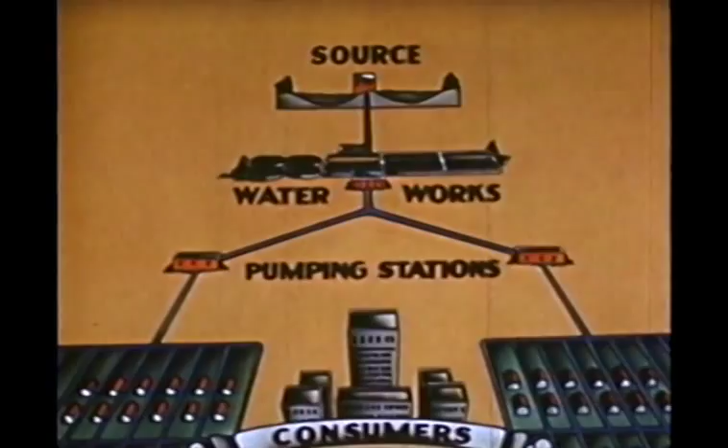The powerful surging waters of the Missouri River, the Big Muddy, are the source of one city's system. Here, mingled in the turbulent flow, are waters from the mountains of Wyoming and Montana, from the plains of the Dakotas, of Nebraska, and of Iowa, a mighty flow of water which is tapped for Kansas City.

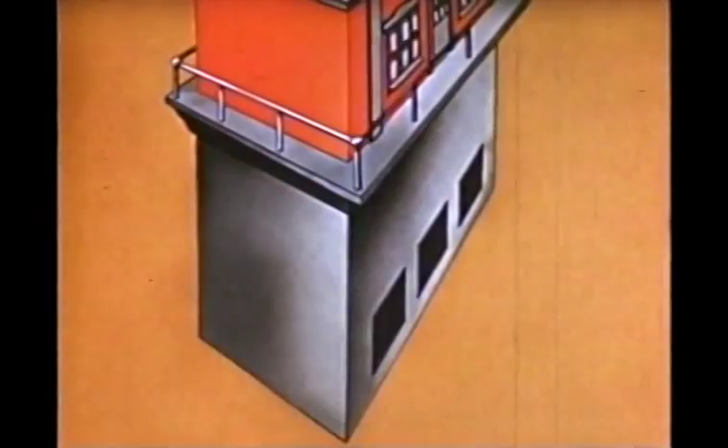The water is drawn in at the intake building on the deep current side of the river 4 miles above the city. This building rises from the bed of the river, so that no matter how low the surface level, the water supply will never fail. The water must pass through the intake bars, which keep out driftwood and other large debris.

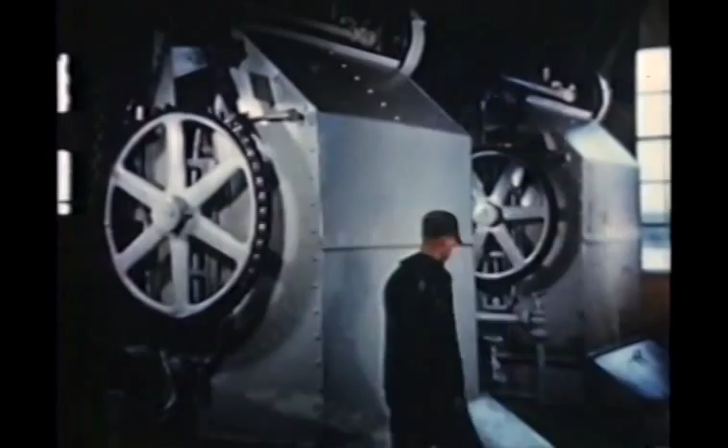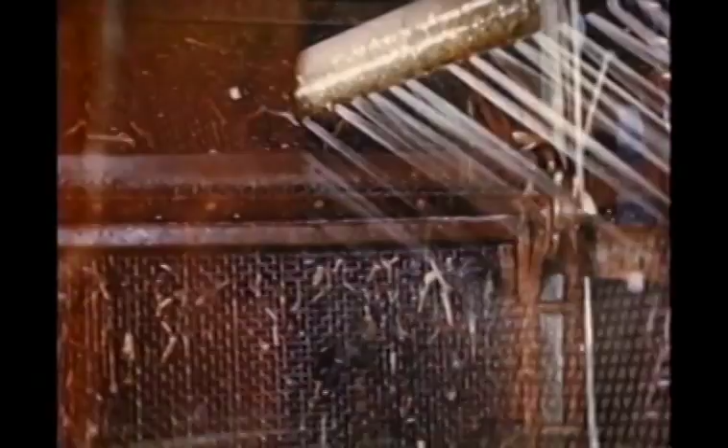The water must pass through a series of revolving screens, then is drawn up and out. The screens behind the bars are fine enough to hold back the smaller cargo of the river. Powerful jets of water at intervals are directed against the screens to keep them clean.

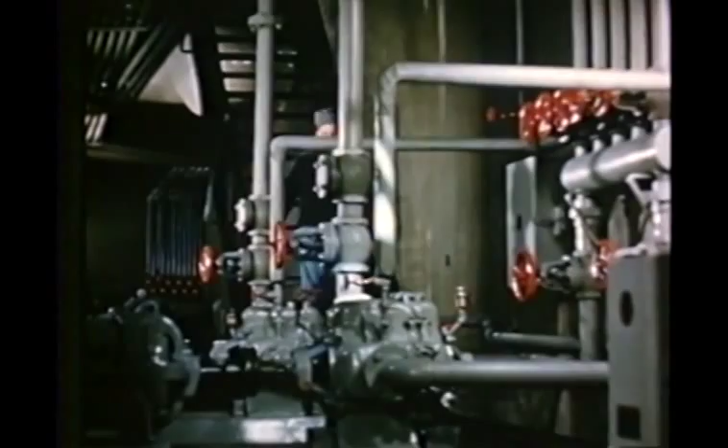Just north of the intake building is the low-lift pumping station, which draws the water from the river intake. Within this building are the first of a series of power machines. 5 huge electric motors drive the centrifugal pumps that draw billions of gallons a year to meet the needs of the Kansas City area.

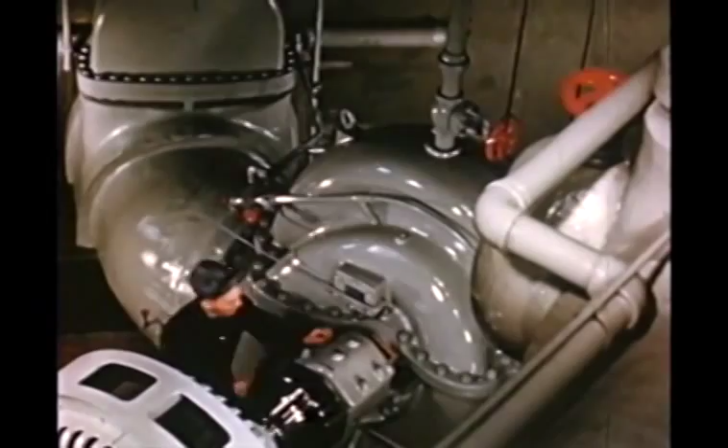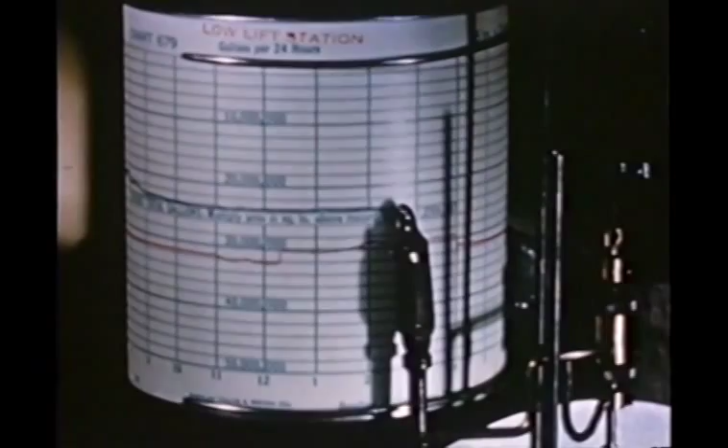These mammoth pumps have a total capacity of 160 million gallons every day. Constant check and measurement of the flow requires a vast array of precision instruments and recording equipment. At the rate of over 27 billion gallons every year, the water is on its way to the first stage of transformation from muddy water to clear water.

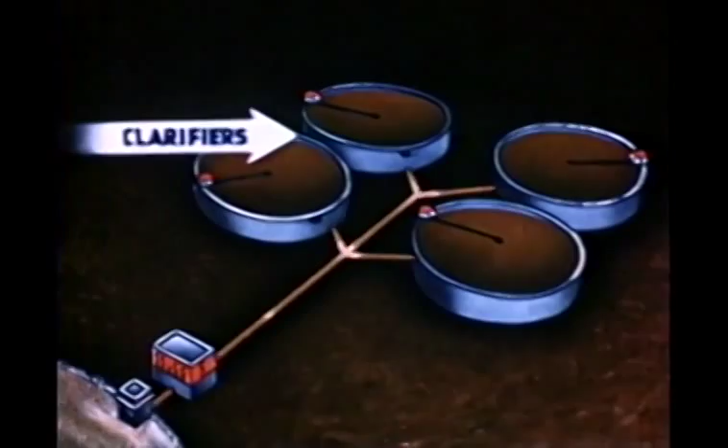From the low-lift pumping station, near the river's edge, the water is pumped underground to the group of 4 clarifiers. These primary clarifiers are simply huge settling basins through which the water is moved very slowly, allowing the greater part of the mud and other foreign matter to settle.

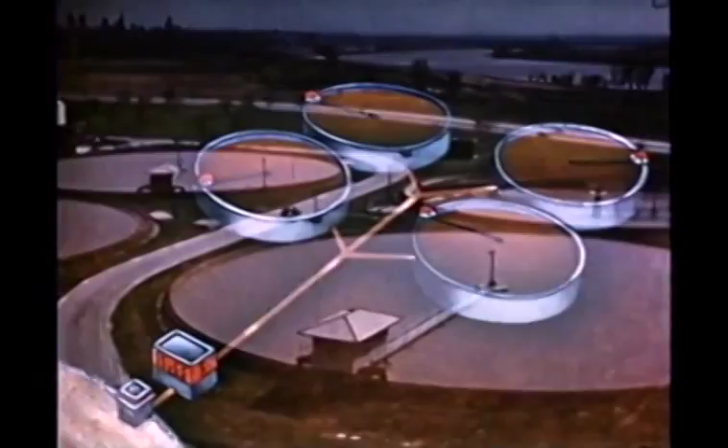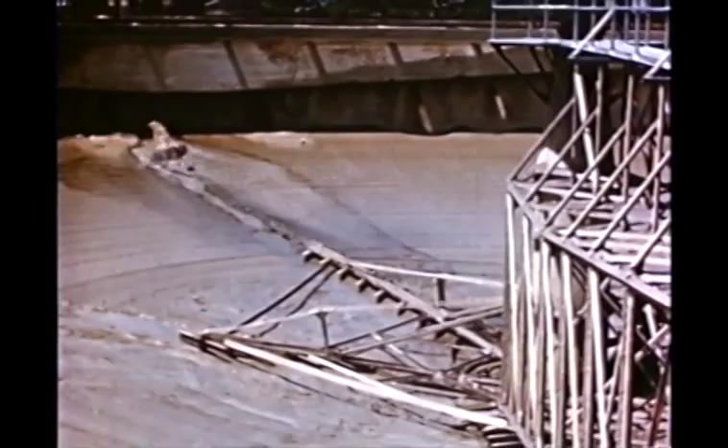Each of the 4 monster basins holds 4 million gallons. The huge capacity is easily seen when the basin is empty. Within the settling basin, the water loses most of its heavier mud and silt.

The science of chemistry plays a vital part in the modern water system, and so at every stage, samples are brought into the laboratory. This is water as it comes from the river. After passing through the settling basins or primary clarifiers, the water is noticeably clearer.

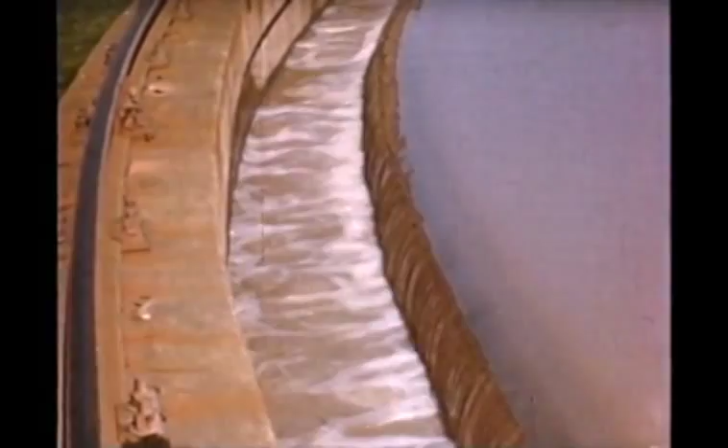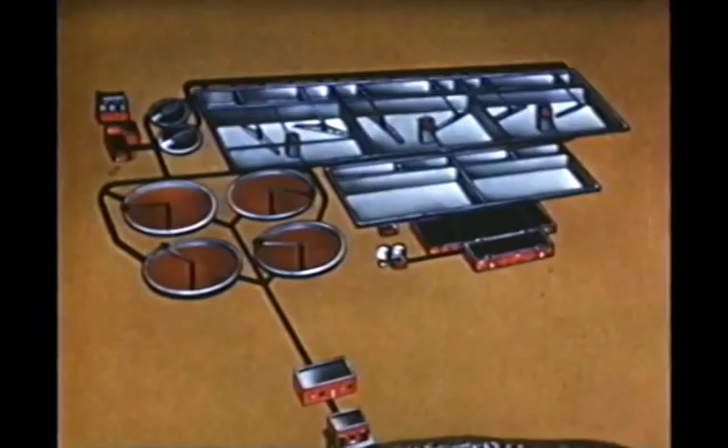And so, having rid itself of part of its burden, the water flows out of the settling basins on its way to a chemical treatment, the first of several which originate in the chemical building. From the settling basins, the water enters mains underground. Here, the water receives its first treatment of chlorine from the chemical building. This initial chlorination destroys most of the bacteria present in the river water.

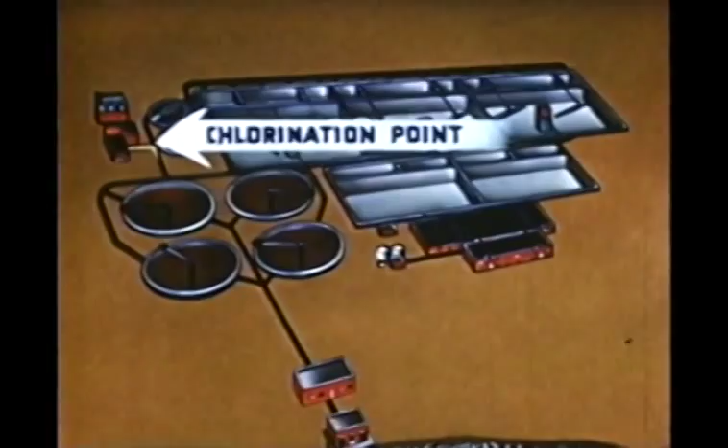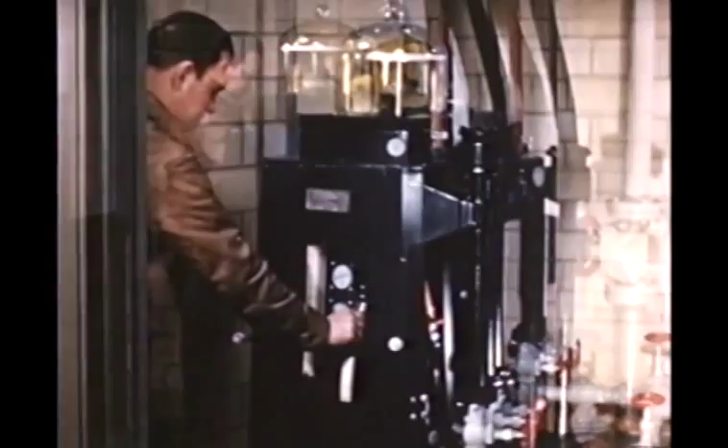While a full carload of chlorine is required each month, it actually takes only 15 pounds to sterilize 1 million gallons of water. The quantity of chlorine to be added is carefully controlled. From the chlorination point, the water moves on to the mixing tanks.

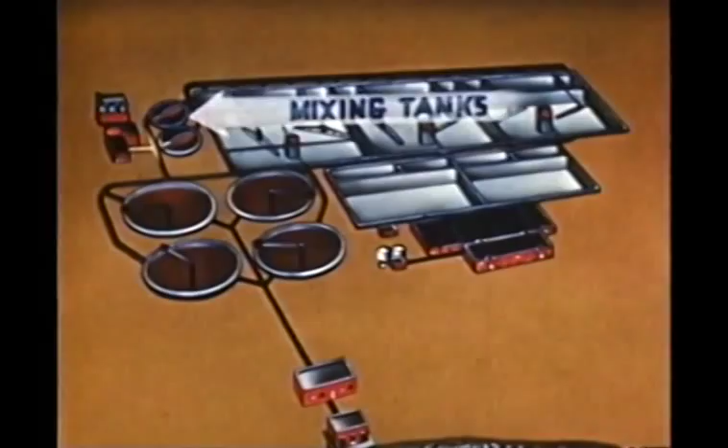In these great basins, located just east of the chemical building, the water receives the bulk of the chemical treatment it must undergo to soften, clarify, and sterilize it. The other elements necessary to the treatment of water are brought directly to the chemical building to be carefully checked and weighed to meet the requirements of modern scientific water purification. By a series of conveyors, the contents of the cars are moved to storage bins.

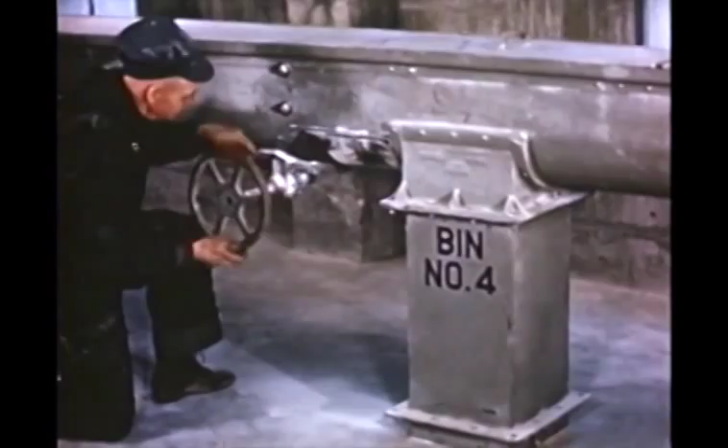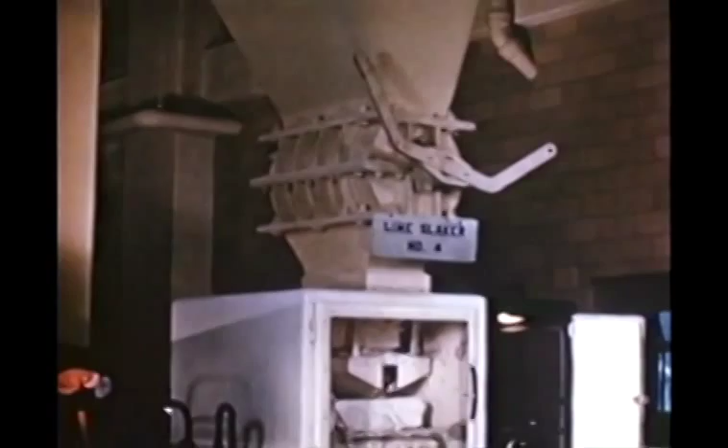From the bins, the chemicals are automatically released as needed to electric weighing machines or dispensers. These machines are adjusted to deliver the exact quantities of chemicals required. Chemists are checking constantly to make sure that the quantities released are those specified by the main laboratory. Every step in the purification of water must be scientifically controlled.

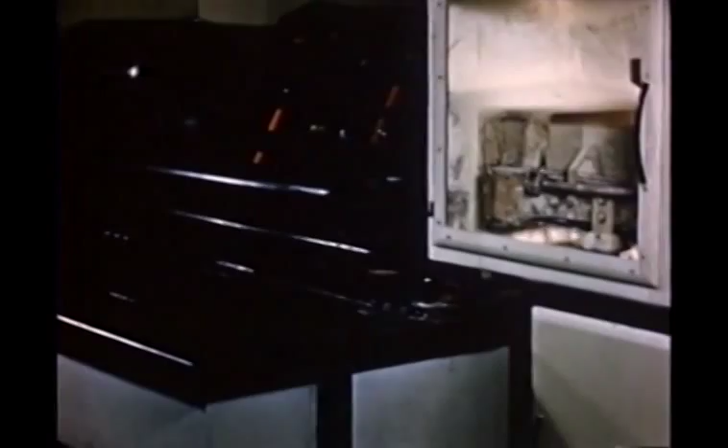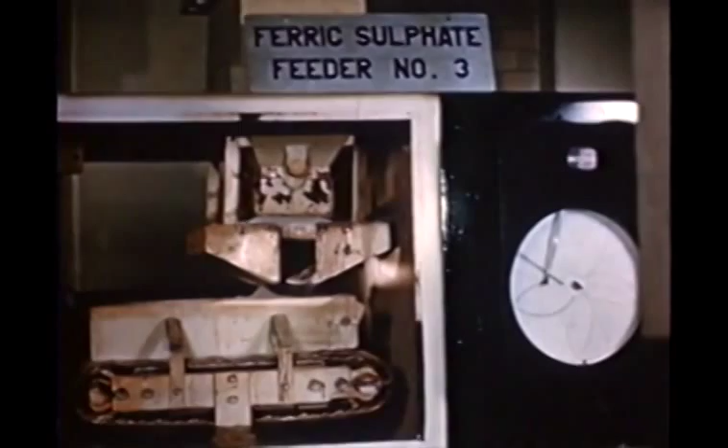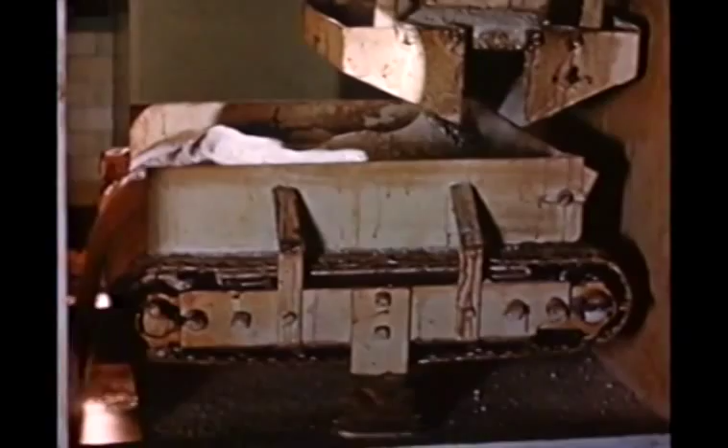Chemicals are fed by the dispensers into tanks to be mixed with water for ease in handling. The lime helps to soften the water. Ferric and aluminum sulfate will serve to clarify it. And sodium carbonate, or soda ash, is an additional softening agent. The solutions move into troughs leading out of the chemical building.

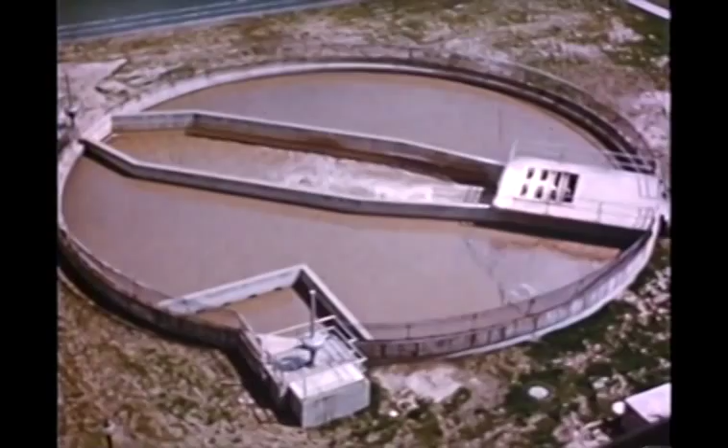The master flow meter shows the volume of water to be treated in the mixing basins. In the center of each basin is the mixing flume, where the chemical solutions are added to the water as it flows in from the clarifiers. Now, with the chemicals thoroughly mixed, the water moves out of the mixing basins. Flowing underground, it enters the primary flocculator, or first chemical reaction basins.

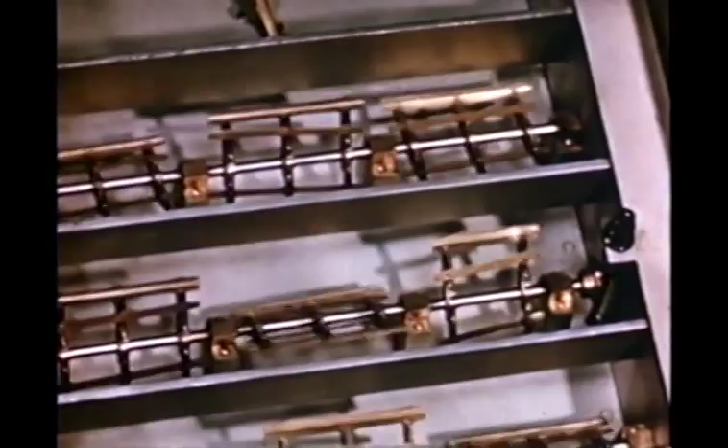These basins are equipped with flocculators, or mixing paddles, shown here in a working model. The purpose of the paddles is to gently agitate the water. Laden with chemicals, the water enters these primary reaction basins. Now the chemicals form sticky, gelatin-like particles known as floc. The chemicals have begun to do their job.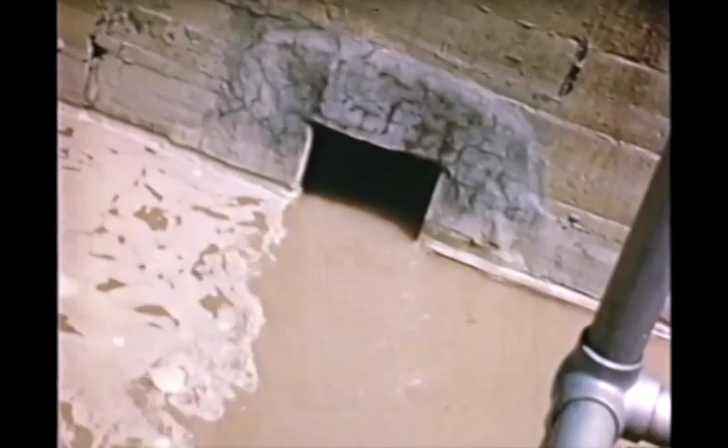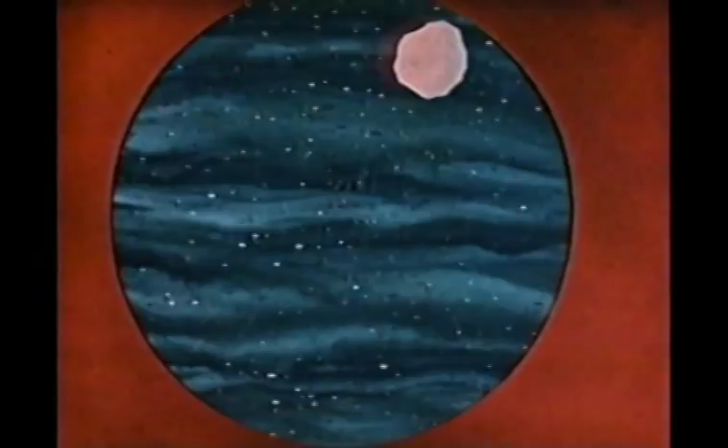If the process were studied under a microscope, it might look like this. Under the gentle agitation of the water caused by the paddles, the floc moves about, attracts, and absorbs the mud, silt, and bacteria. In so doing, the floc grows in weight and volume. This is the water as it enters the primary reaction basins, and as it looks after the floc has absorbed the foreign matter.

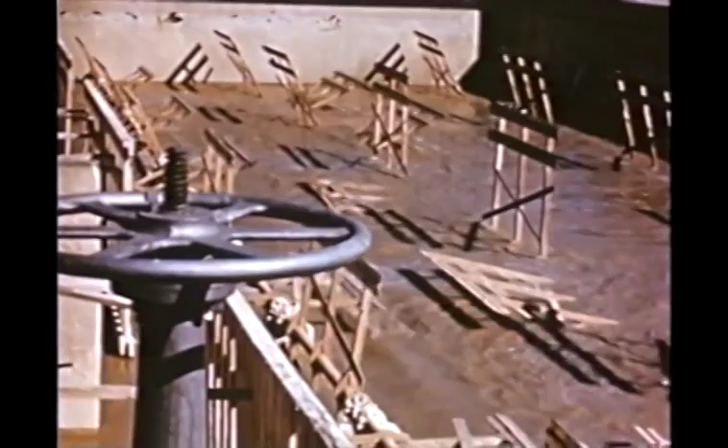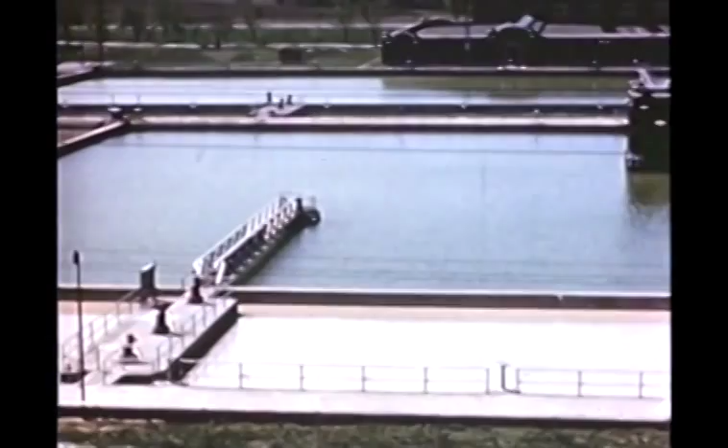The chemical reaction basins are full at all times under normal operation. When the basins are drained periodically for inspection, the size and arrangement of the equipment can be seen. Now the murky waters of the reaction basin are ready to move on into the larger basin, the secondary clarifier. The concrete wall separating the two has openings beneath the surface.

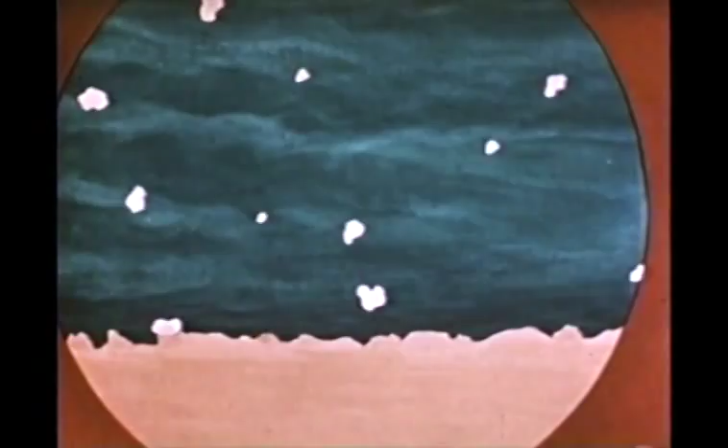The water, heavy with floc, moves through the openings in this wall into the clarifiers or secondary settling basins. The contrast in color between the water in the reaction basin and in the clarifier gives dramatic evidence of the change taking place. The comparatively quiet water of the clarifier or settling basin allows the billions of tiny pieces of floc to sink to the bottom, carrying with them most of the remaining impurities in the water.

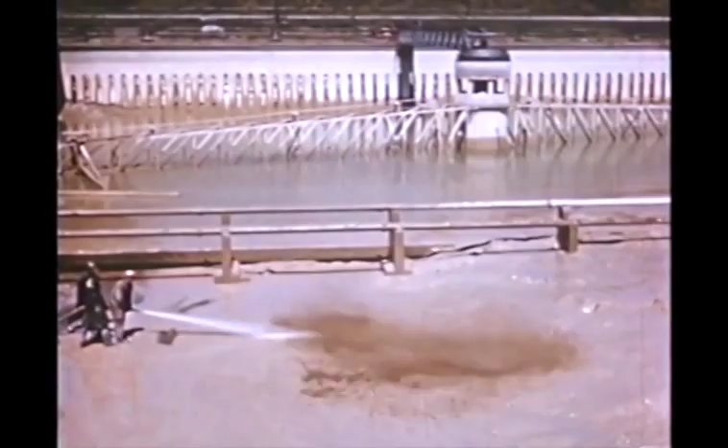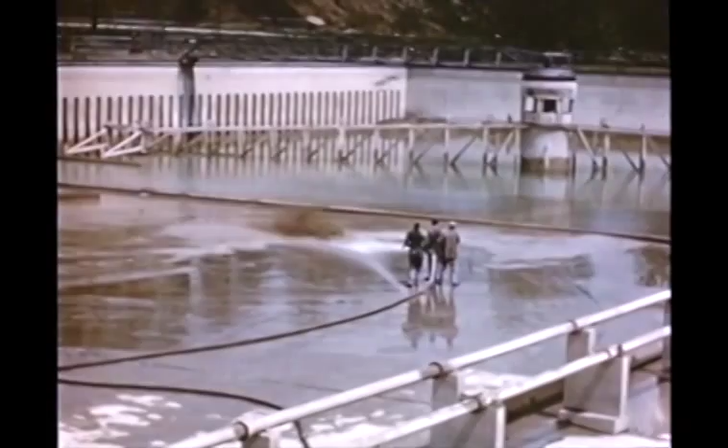This settling process goes on every hour of every day. If it were not for the mechanical equipment, this tedious operation would have to be done often in order to remove the tons of sediment. It requires approximately 5 hours to drain the basin, another 5 to refill it. But in the center of each basin is a giant bridge-like structure called a sludge rake. It revolves on a pivot slowly so as not to agitate the water. It scrapes the sediment deposits from the bottom into a center drain, thus keeping the basins clean and free of sludge.

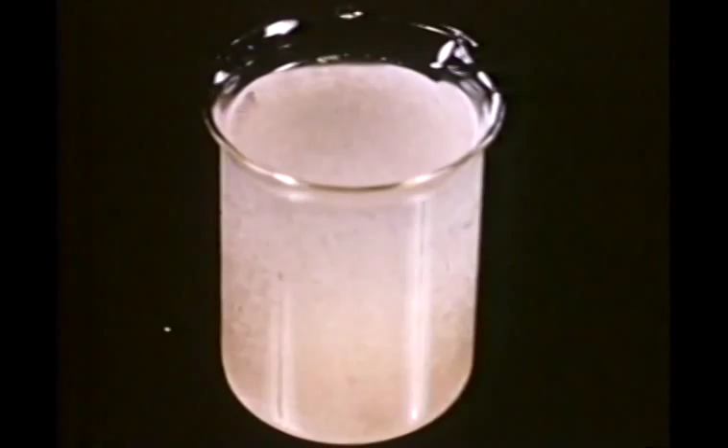This is the water heavy with floc as it leaves the primary reaction basins. And this is the water after the settling or clarifying process. From the primary clarifier, the water moves on for further treatment. The water passes to an underground compartment for carbonation. From the chemical building, carbon dioxide is piped to the water.

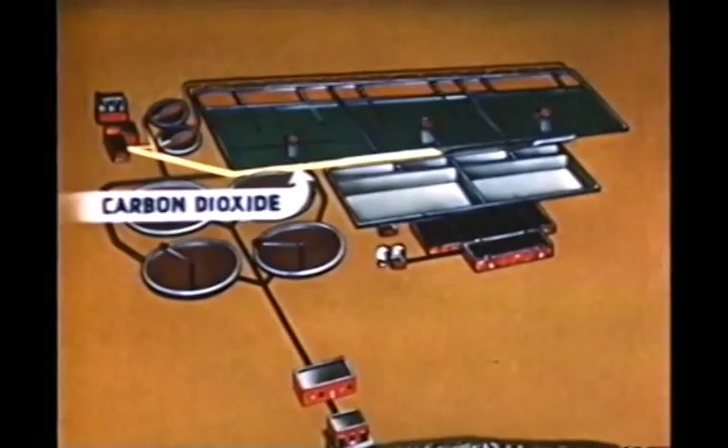Another step in the water softening process. Here again, careful scientific control plays its part. The amount of the carbonation must be regulated with precision. As the water pours into the compartment, carbon dioxide bubbles up through it.

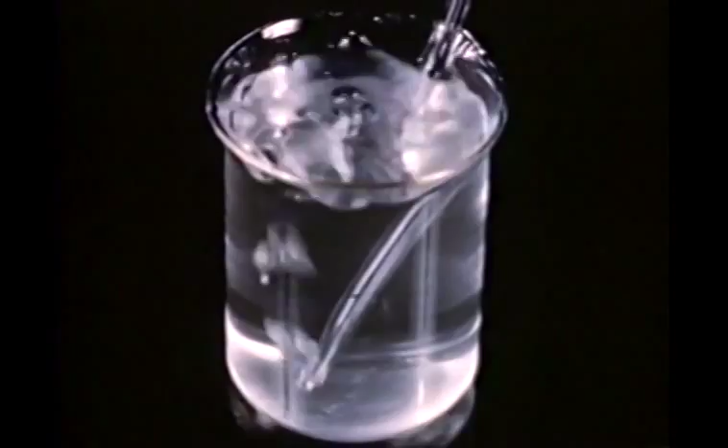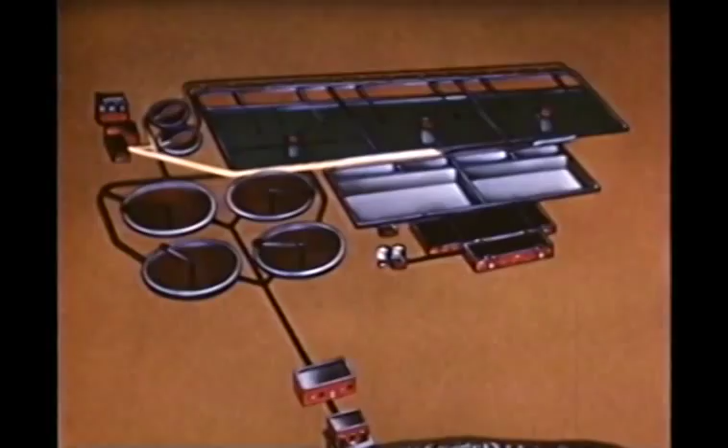The release of minerals from solution by carbonation gives the water a rather cloudy appearance. After carbonation, the water moves on for additional chemical treatments. Additional chemicals are applied at this point to further clarify the water. Activated carbon is added for taste and odor control. From here, the water flows into the secondary reaction basins.

Mixing paddles in the secondary reaction basins again keep the water moving, allowing the clarifying and softening process to go on. And to permit the settling of sediment, the water moves into the final clarifier basins. Even though the water at this stage is suitable for human consumption, modern purification methods demand still further treatment. The sample shows evidence of that fact.

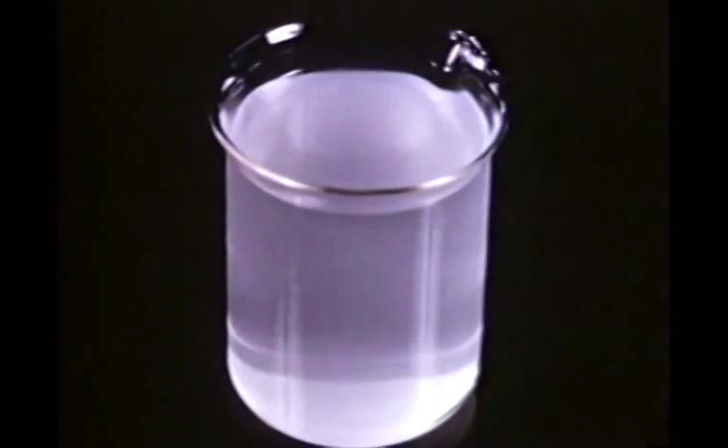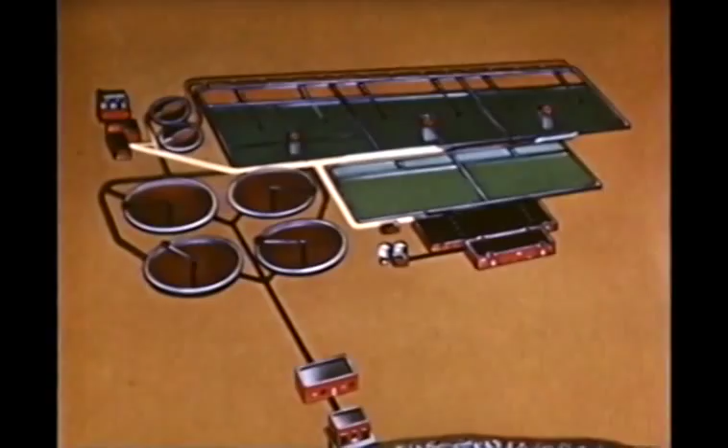As a final step in the softening process, more carbon dioxide is added. With final carbonation, the water enters the filter building, the last stop through the purification system. It has taken 24 hours to bring the water from the Missouri River to the filter building. Within the building are 24 filter tanks, where the minute foreign particles remaining are filtered out. Here, as in all other purification steps, batteries of meters and recording instruments allow a constant check on operations.

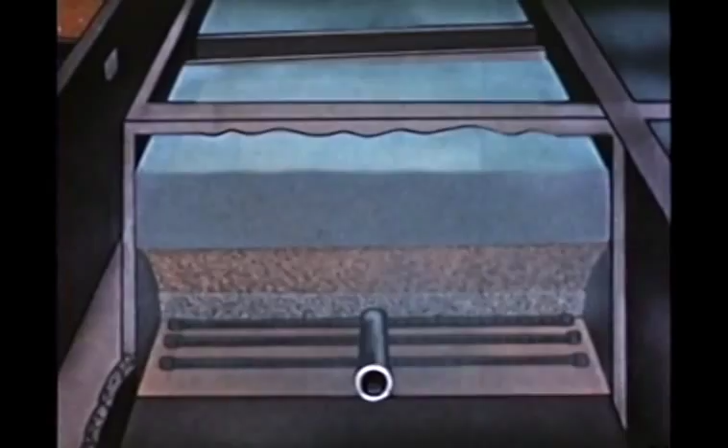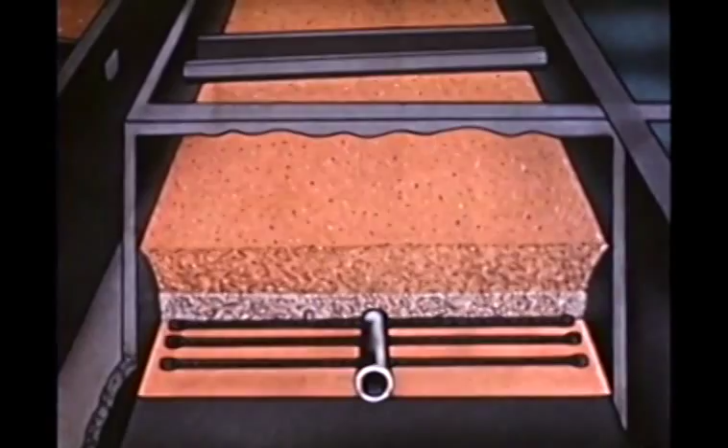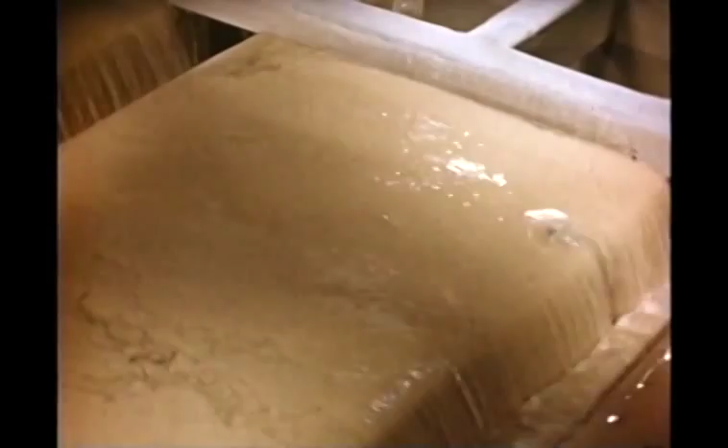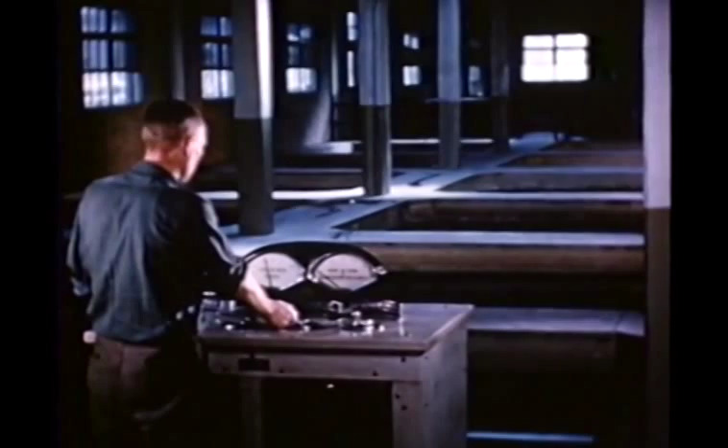About every 3 days, equipment is set in motion to drain each filter tank for cleaning. Water passes down through the layers of sand and gravel to outlet pipes. Draining of the tanks is necessary when the filter beds become clogged. First, the crust on the top of the filter beds is broken up. Clean water is then forced up through the strainer system. The sand is lifted and thoroughly agitated. The foreign matter is carried away by the wash water. This filter tank can now be refilled and put back into service.

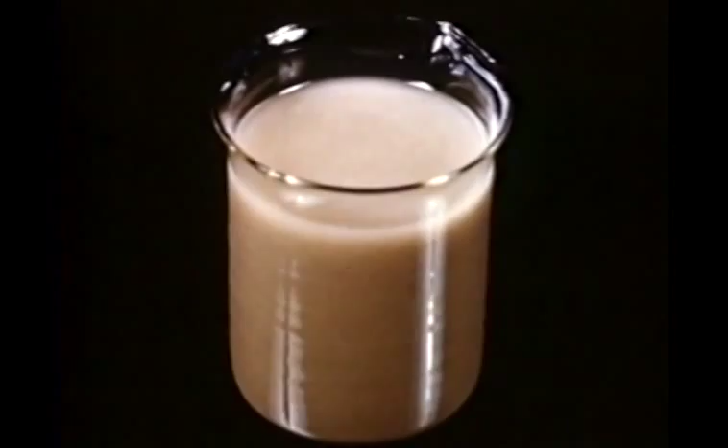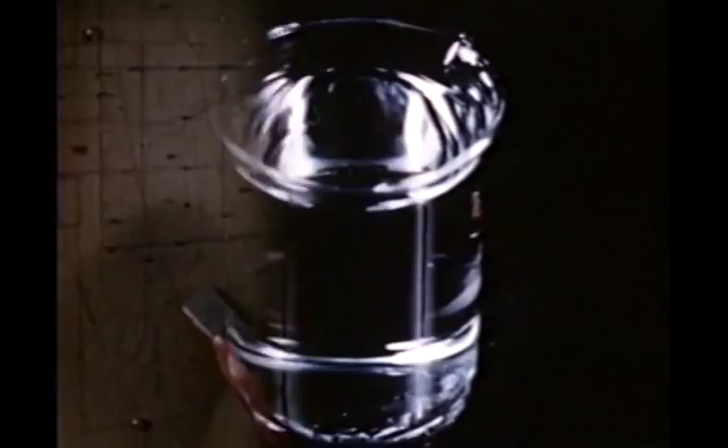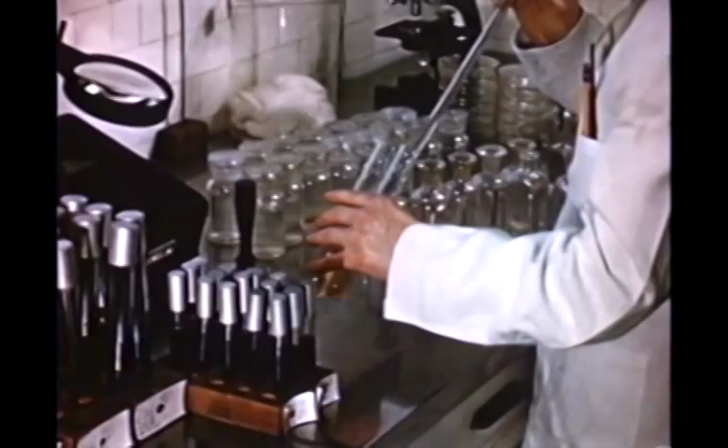One final purification treatment remains, the last application of chlorine, providing an extra margin of safety. Thus the transformation from the raw river water, muddy and germ-laden, to the clear, healthful water we drink. But laboratory control has not ended. Each week, samples of water are taken from zones throughout the city, submitted to bacteriological tests, checked for harmful impurities. Every device, every skill in modern chemistry is enlisted to produce and maintain the purity of your water.

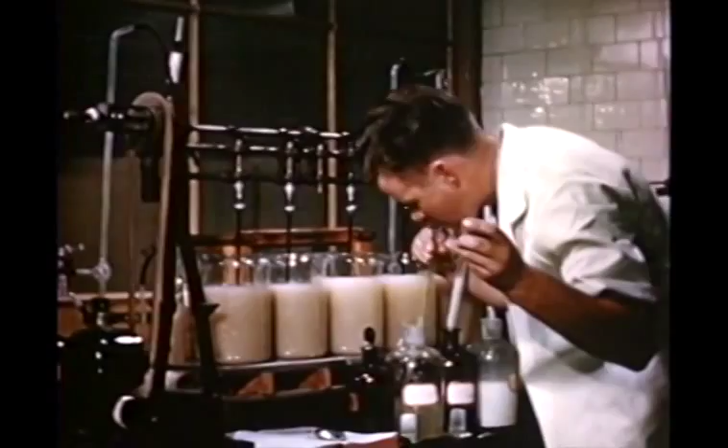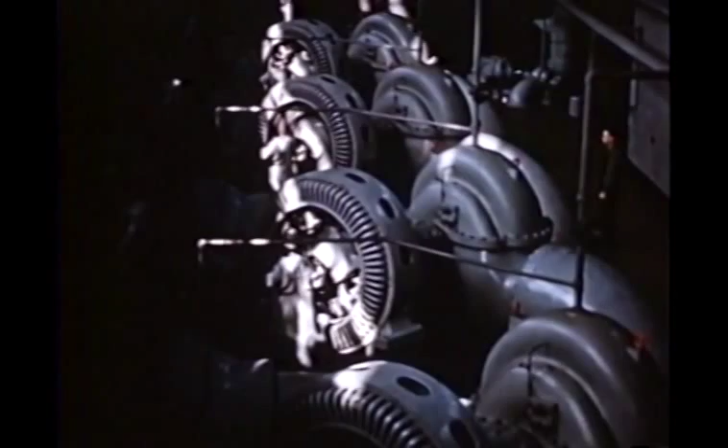Next to the filter building stands the secondary pumping station. Housed in this building are 4 great electric motor-driven pumps, delivering over 27 billion gallons of water per year. The pumping equipment at this station guarantees an ample supply of water for the Kansas City area today and gives assurance that future demands as well can be met as the city grows. On the meters and automatic recorders is written the story of an unfailing public service.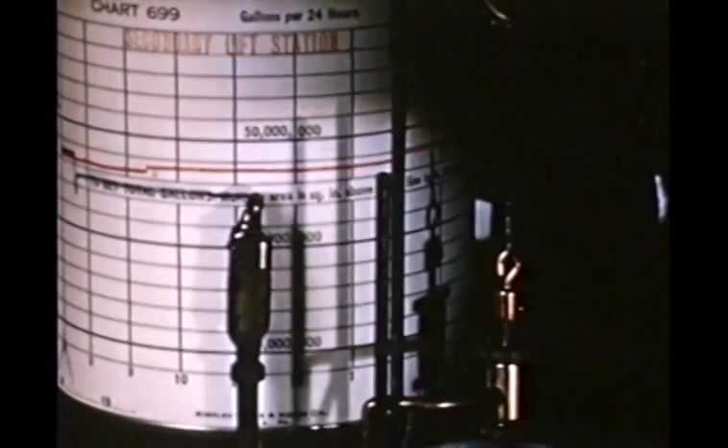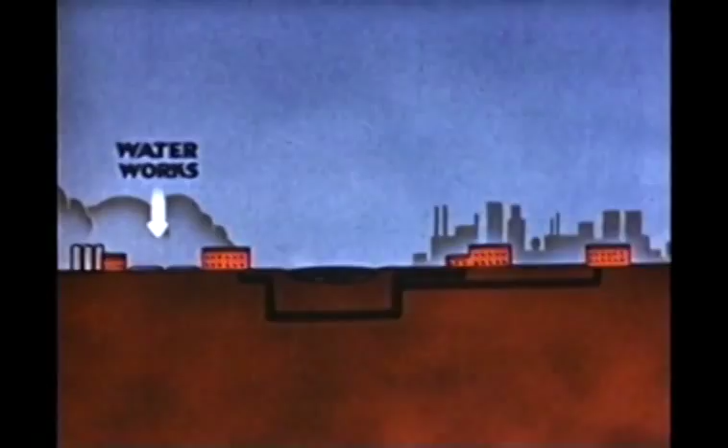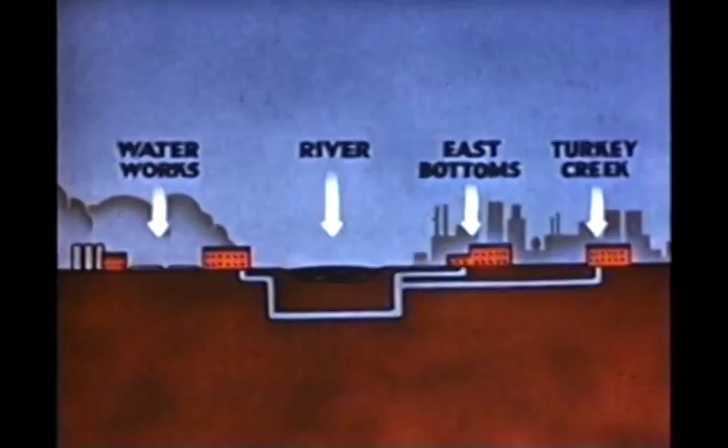And so, from the purification plant, water is sped on its way to you. Through pipes dipping 300 feet below the Missouri River to pumping stations in the East Bottoms and at Turkey Creek. Located in the East Bottoms Industrial District, this station draws upon an underground reservoir with an 18 million gallon capacity. Its 3 mighty centrifugal pumps, electrically powered, deliver more than 7 billion gallons of water per year.

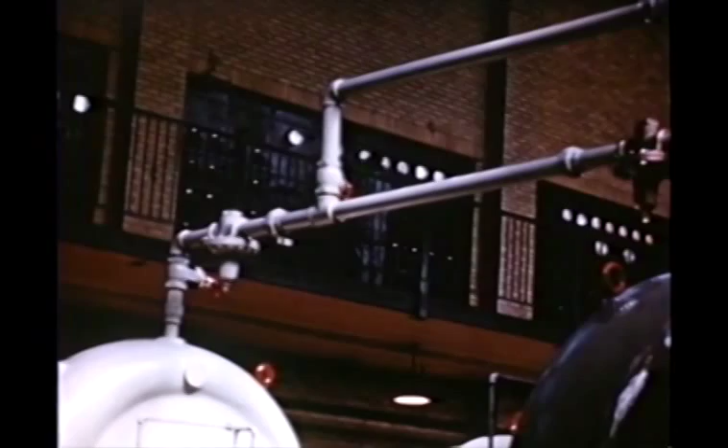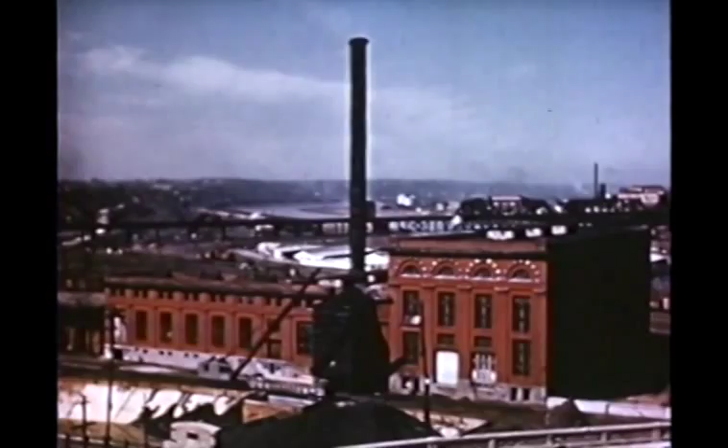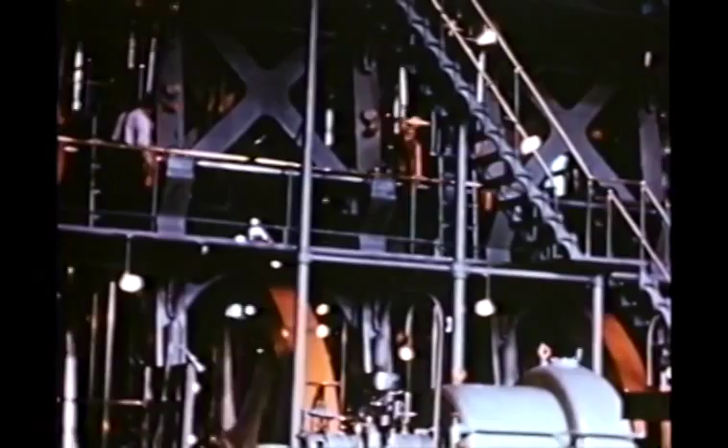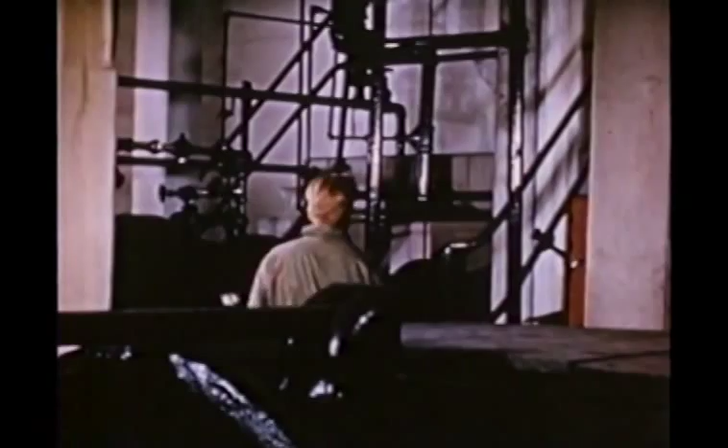The Turkey Creek Pumping Station, located in the West Bottoms Industrial Area, depends upon steam for its power. Its great boilers consume 70 tons of coal each day. Six units pump a total of more than 17 billion gallons of water a year. Under the impetus of the lift stations, the water, under controlled pressure, surges into the city's mains.

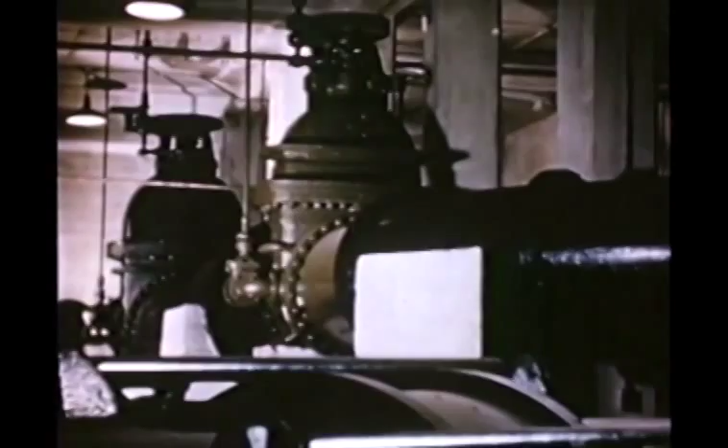Thus, to Midwesterners, hundreds of thousands strong, goes the unceasing flow of water, moving through the vast network of pipes and mains that crisscross the city beneath the surface of the streets, reaching every point where people choose to live and work. Extending into outlying areas, given new speed by booster pumps along its way. Stretching ever farther from its source to serve additional thousands as the city grows and expands its boundaries.

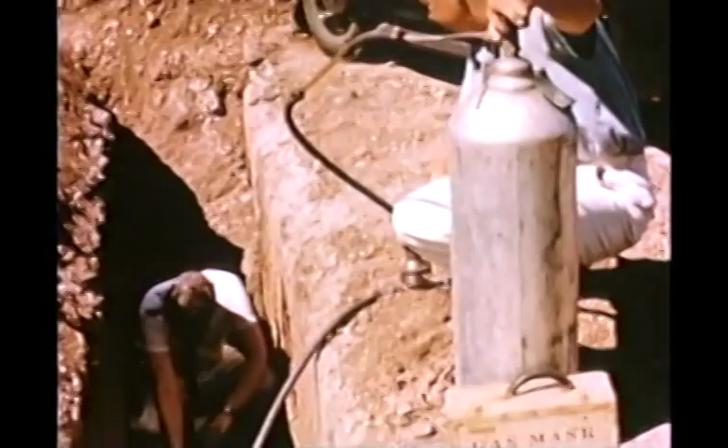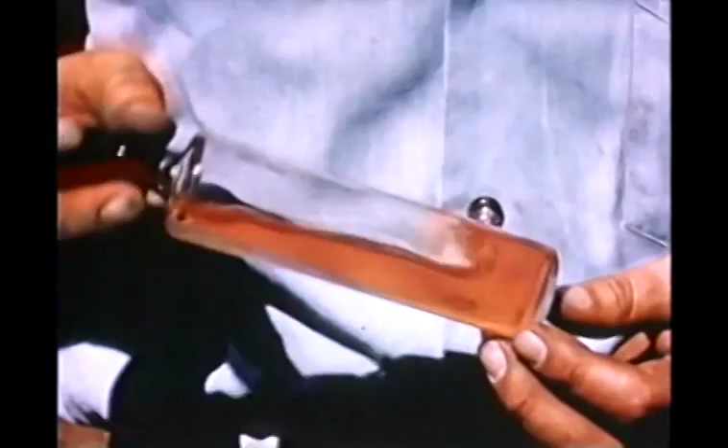Final safeguard, sterilization of the new main as it prepares to deliver its precious commodity. Testing to guarantee its unqualified purity. This, then, is the inside story of the everyday magic that taps the muddy waters of the Big Missouri. Treats it by the processes of modern chemistry, assembled for the job that must be done. Delivers it by the power of machines, harnessed for the task that must not fail.

To give water for industry, water for the engines and machines that do our daily work, water to beautify our homes, water for pleasure and recreation, water for the means to safeguard our health, water for our homes ready to flow at any hour on any day, and water for the lines that every year save lives. This is the life stream of our city.